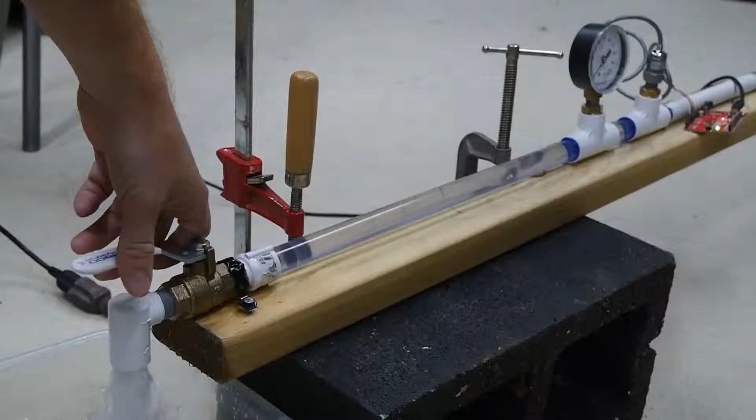It's easy to forget how heavy water is since we hardly ever carry more than a few ounces at a time. But if you add up all the water in the pipelines of your city, or even just the pipes in your house, it makes up quite a bit of mass. And when all that water is moving through a pipe, it has quite a bit of momentum.

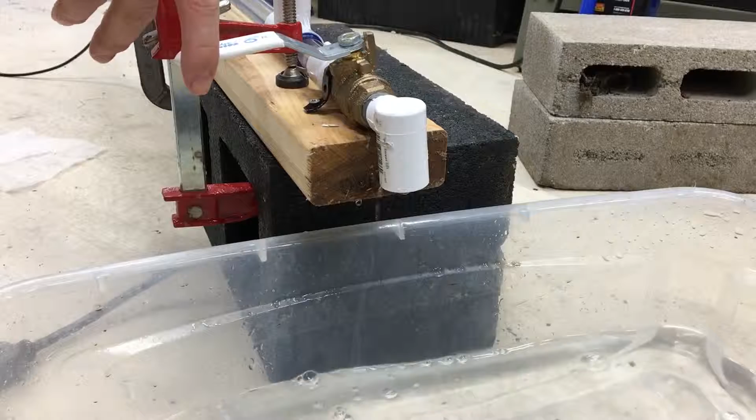If you suddenly stop that movement, for example by quickly closing a valve, all that momentum has nowhere to go. Since water isn't compressible or springy, it can't soften the blow. You might as well be slamming concrete into the back of the valve and the walls of your pipe. Instead of being absorbed, that sudden change in momentum creates a spike in pressure that travels as a shockwave through the pipe.

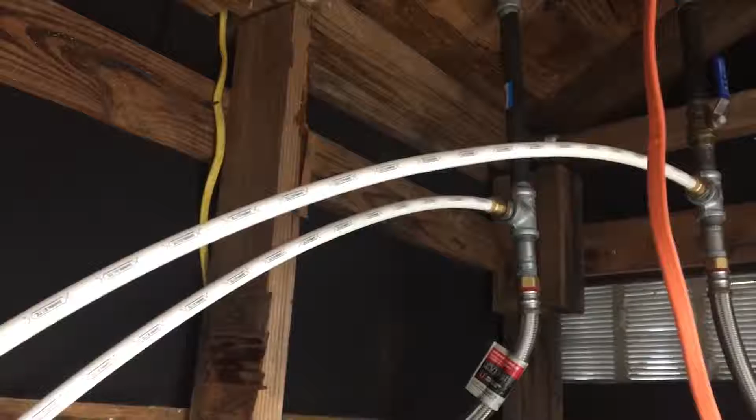Sometimes you'll even hear this shockwave as banging in your walls when you close a faucet or run the washing machine, hence the superhero-esque nickname, water hammer. Banging pipes inside your walls can sound a bit spooky, but for large diameter pipelines that can be hundreds of kilometers long, that surge in pressure from a change in momentum can cause major damage.

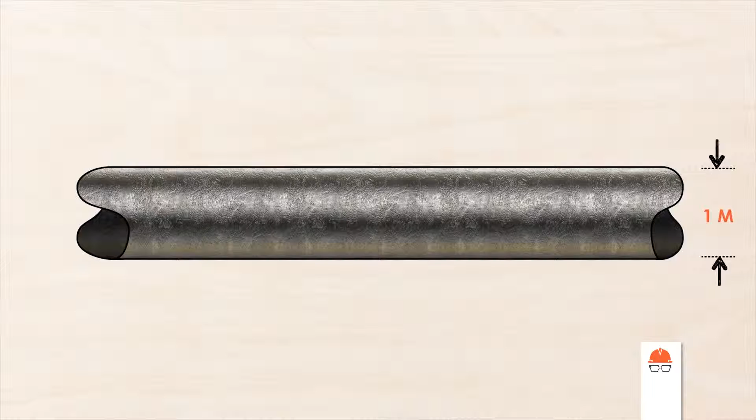Let's do a quick calculation. If you have a pipeline carrying water that is 1 meter in diameter and runs for 100 kilometers, a fairly average sized pipeline, the mass of water in the pipe is about 80 million kilograms. That's a lot of kilograms. In fact, it's the equivalent of about 10 freight trains.

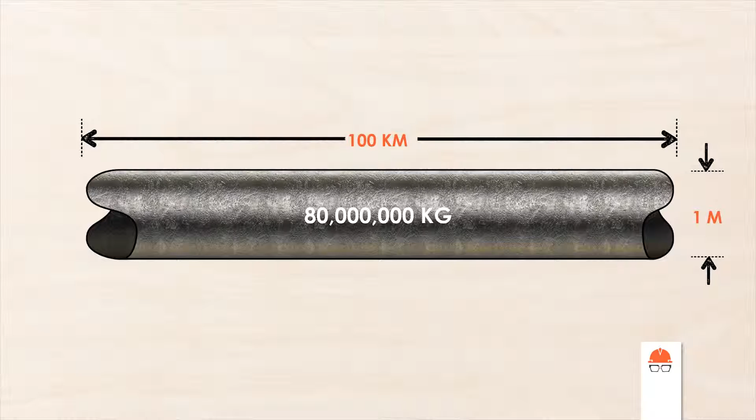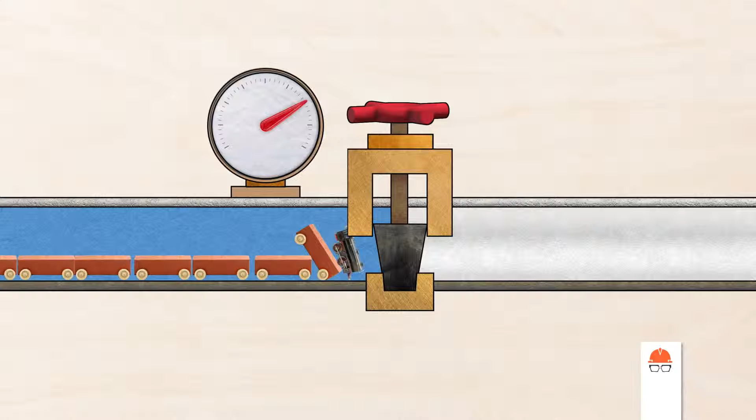Imagine you're an operator at the end of this pipeline in charge of closing a valve. If you close it quickly, you've essentially slammed those trains into a brick wall, and the pressure spike that results from such a sudden change in momentum can rupture the pipe or cause serious damage to other parts of the system. There's actually another term for when a large spike in pressure ruptures a sealed container, a bomb. And water hammer can be equally as dangerous.

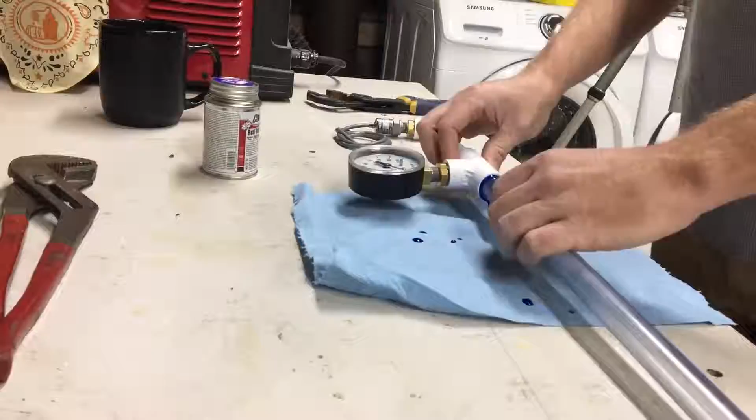So how do engineers design pipe systems to avoid this condition? Let's build a model pipeline and find out. Here's my setup. I've got about 100 feet or 30 meters of PVC pipe connected to the water on one end and a valve on the other. I also have an analog and digital gauge so we can see how the pressure changes, and a clear section of pipe in case anything exciting happens in there. I mean civil engineering exciting, not like actual exciting.

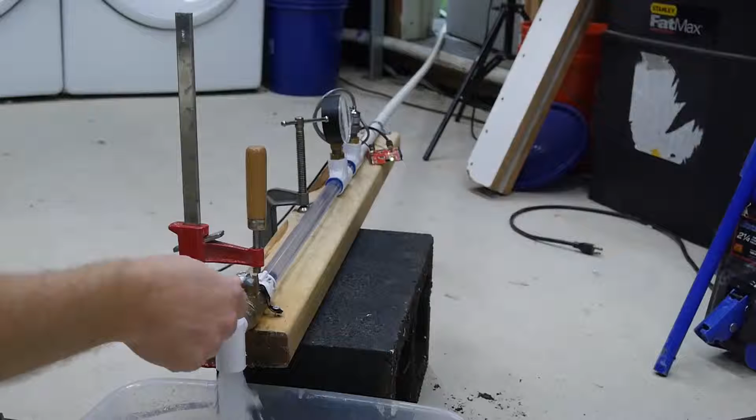Watch what happens when I close this valve. It doesn't look like much from the outside, but look at the data from the pressure gauge. The pressure spikes to over 2,000 kilopascals, or about 300 psi. That's 5 times the static water pressure. It's not enough to break the pipe, but way more than enough to break this pressure gauge.

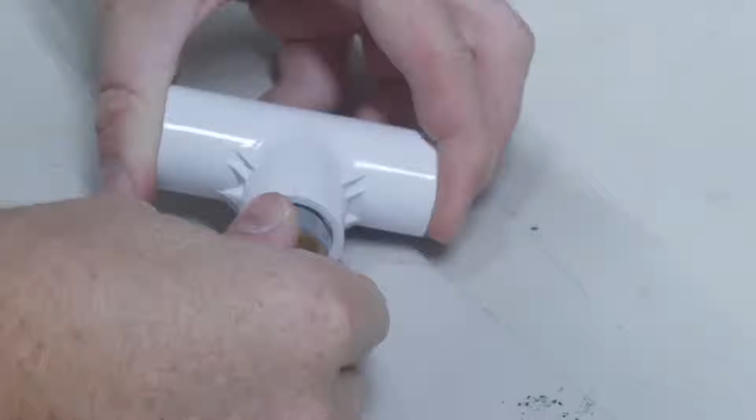You can see why designing a pipeline or pipe network can be a little more complicated than it seems. These spikes in pressure can travel through a system in complicated ways. But we can use this simple demonstration to show a few ways that engineers mitigate the potential damage from water hammer. This is the equation for the pressure profile of a water hammer pulse.

We're not going to do any calculus here, but the terms of this equation show the parameters that can be adjusted to dial back these damaging forces. And the first one is obvious. It's the speed at which the fluid is moving through the pipe. Reducing this is one of the simplest ways to reduce the effect of water hammer.

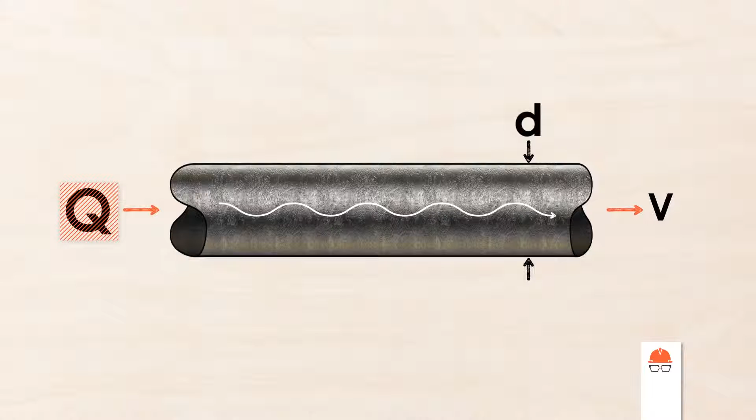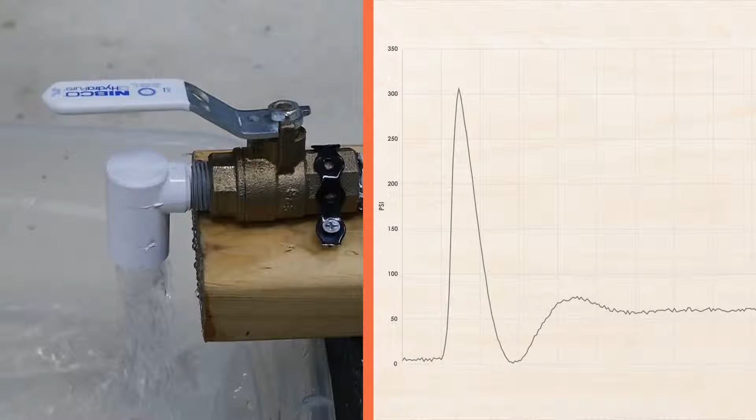Velocity is a function of the flow rate and the size of the pipe. If you're designing a pipeline, the flow rate might be fixed so you can increase the size of your pipe to reduce the velocity. A smaller pipe may be less expensive, but the flow velocity will be higher, which may cause issues with water hammer. In this case, my pipe size is fixed, but I can reduce the flow rate to limit the velocity. Each time I reduce the velocity and close the valve, the resulting spike in pressure decreases.

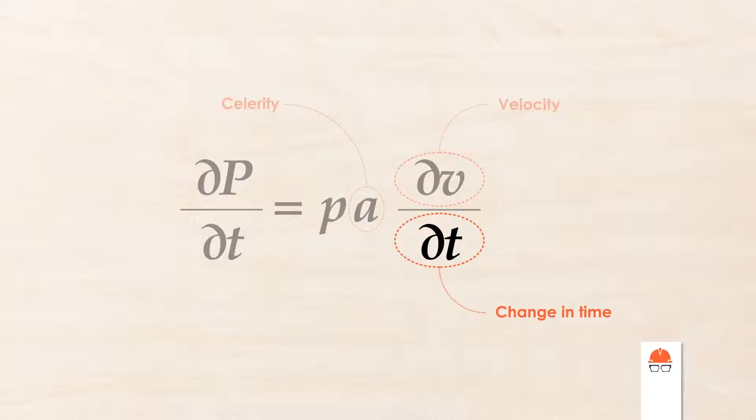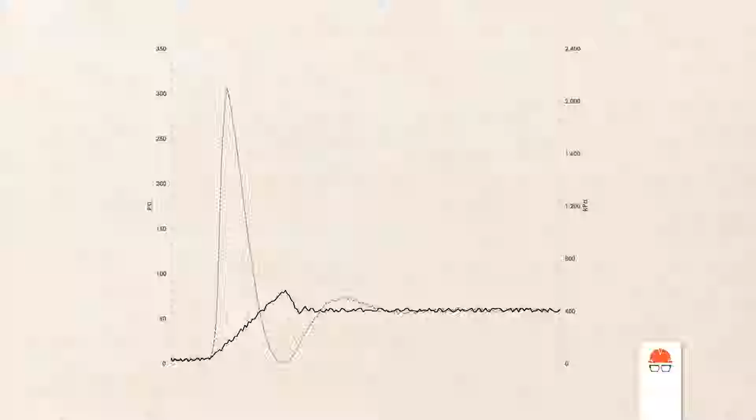Next, you can increase the time over which the change in momentum occurs. One common example of this is adding flywheels to pumps so they spin down more slowly rather than stopping suddenly. Another example is just to close valves more slowly. If I gently shut the valve rather than allowing it to snap shut, the pressure changes are more subtle.

On large pipelines, engineers not only design the components, but develop the requirements for operation of the equipment. This will almost always include rules for how quickly valves can be opened or closed to avoid issues with water hammer.

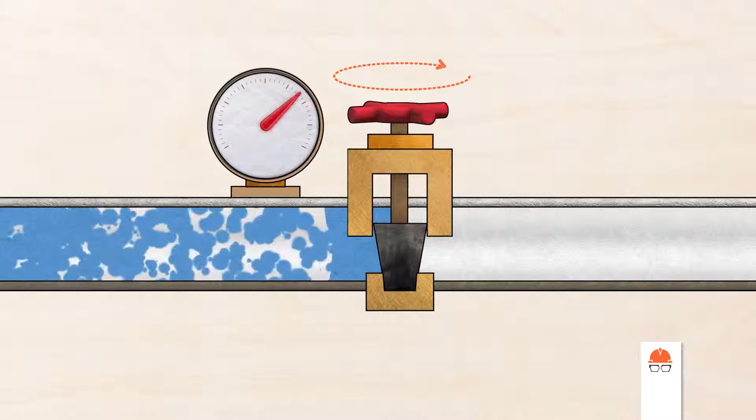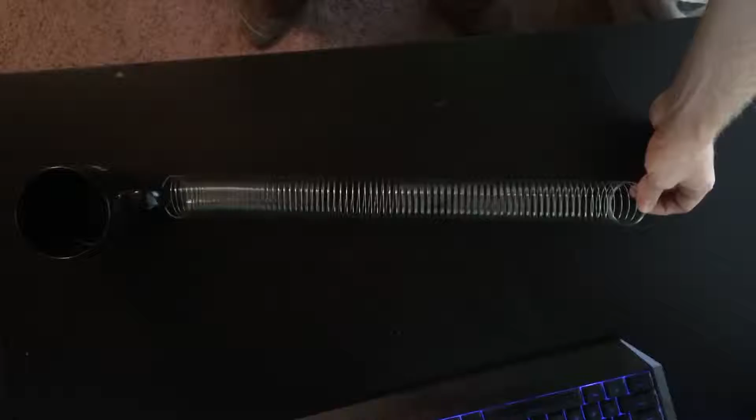The final parameter we can adjust is the speed of sound through the fluid, also known as wave celerity. This describes how quickly a pressure wave can propagate through the pipe. The wave celerity is an indirect measure of the elasticity of the system, and it can depend on compressibility of the fluid, the material of the pipe, and whether or not it's buried in the ground. In a very rigid system, pressure waves can reflect easily without much attenuation.

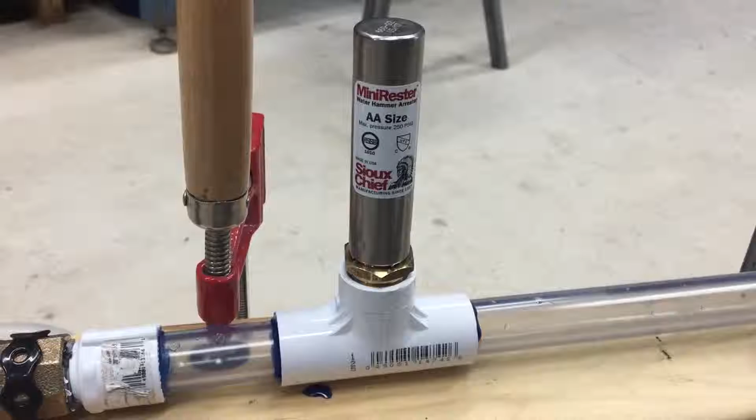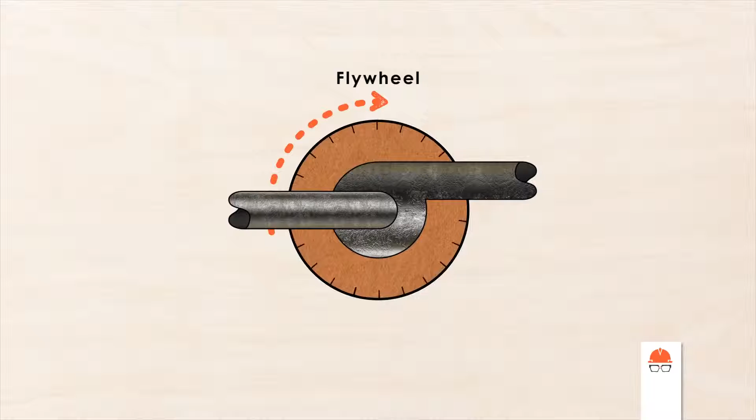I've got flexible PVC pipe sitting on the ground free to move, which is already helping reduce the magnitude of the water hammer. I can increase the flexibility even more by adding an anti-surge device. This has an air bladder that can absorb some of the shock and reduce the pressure spike even further. Anti-surge devices are very common in pipe systems, and they can be as simple as spring-loaded valves that open up if the pressure gets too high.

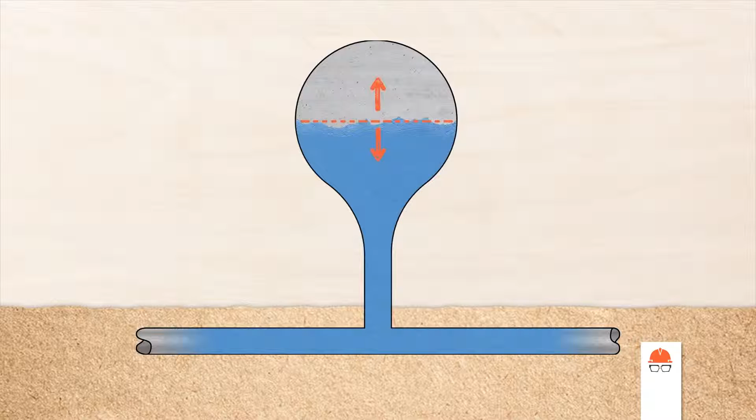In water distribution systems for urban areas, water towers help with surge control by allowing the free surface to move up and down, absorbing sudden changes in pressure. Plumbing is one of the under-acknowledged innovations that has made our modern society possible. But when you harness the power of water by putting it in pipes, it's easy to forget about that power altogether.

Water can be as hard as concrete when confined, and if you bang two hard things together, eventually something's gonna break. If you're an engineer, your job is to make sure it's not the expensive infrastructure you design. Part of that means being able to predict surges in pressure due to water hammer and design systems that can mitigate any potential damage that might result.